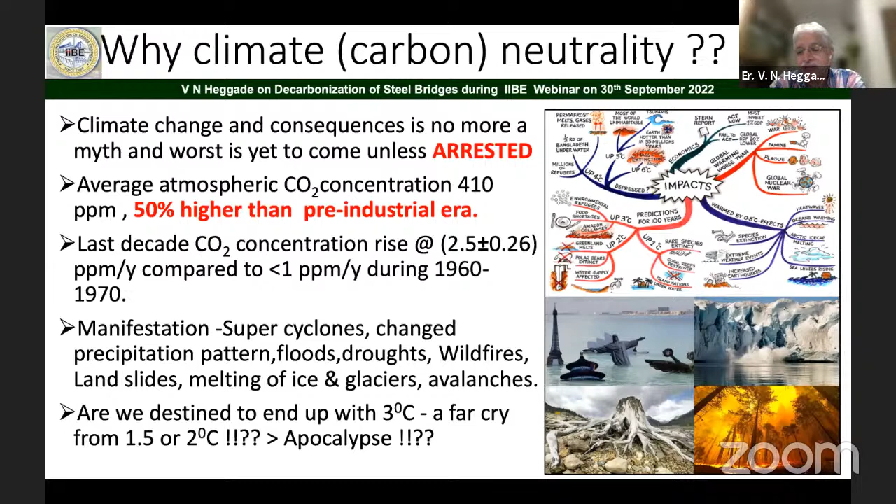If it goes to 3 degrees, we can safely say there will be an apocalypse, based on the manifestations of this climate change taking place all over the world in the form of precipitation patterns, floods, droughts, wildfires, landslides, melting of ice glaciers, as well as avalanches, as you can see here. So all of us have to get geared up to overcome this problem of carbonization, which is leading to global warming and thereby these disastrous manifestations. How to avoid that? We'll have to work on that.

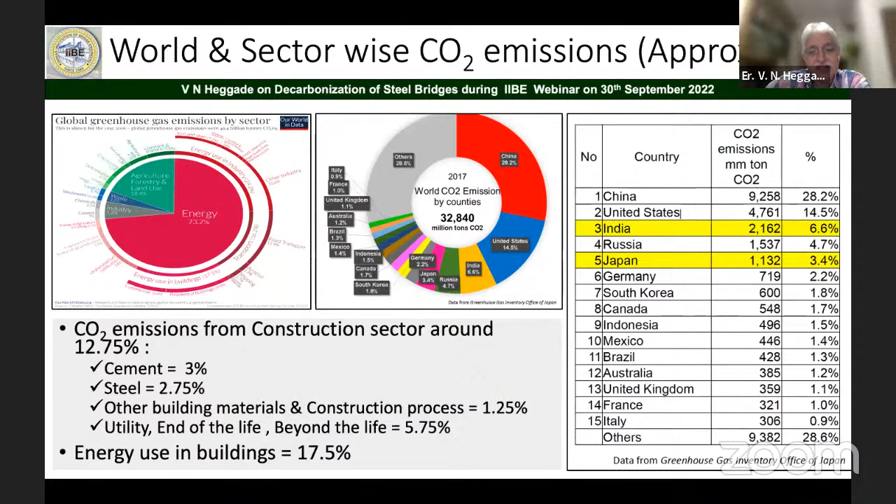Now, because of this, world leaders and thought leaders gathered together. I think it was first in Paris, what is called COP 21, and the world leaders committed to reduce carbon dioxide emissions or make it net zero by 2050, the COP 21 agreement.

The Indian commitment, as you can see here, was made in COP21, but that commitment was revised in the next meeting, which took place in 2021 in Glasgow, called COP26, where our Prime Minister very famously gave the Panchamrita, meaning 5 panaceas.

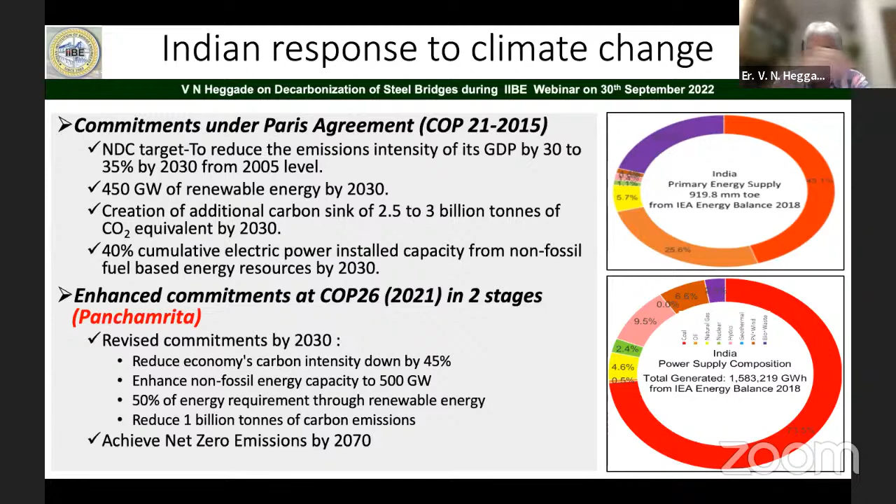Those 5 panaceas are here, like reducing the economy's carbon intensity down by 45%. He proposed this in 2 phases: 45% by the first phase, which is 2030, and then complete carbon neutrality by 2070. This is for the overall Indian perspective, not only meant for the construction sector, it's for all.

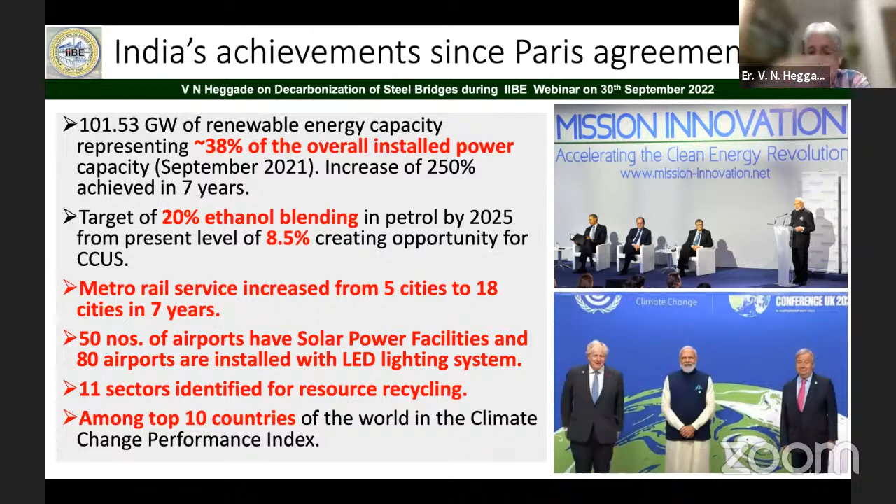But very interesting and exciting for our Indian subcontinent is that whatever we had promised in Paris, in COP21, we could achieve quite a lot of progress in carbon neutrality. And we ranked among the top 10 countries in the world. I think that's a credit. India is in the right path of achieving carbon neutrality as committed by our Prime Minister.

Now let me give the background, because before getting straight away into how to decarbonize steel bridges, let us understand what we are talking about, carbon emission. What does it mean? There are 2 types of carbon: one is called operation carbon, and another is called embodied carbon.

We'll have to understand, carbon emission or the global warming potential has always been expressed in terms of kg carbon dioxide equivalent or ton carbon dioxide equivalent. That means the greenhouse gases, along with carbon dioxide, include other gases like CH4 and N2O, but the majority of greenhouse gas emission, carbon dioxide, accounts for almost 90 to 95%. So most of us concentrate on carbon dioxide emission rather than CH4 or N2O. That is why 1 kg carbon dioxide emission to the environment has a global warming potential of 1 kg carbon dioxide equivalent.

Now, as I told you, there are 2 types of carbon: one is operation carbon, another is embodied carbon. Operation carbon encompasses carbon dioxide emission, which is always equivalent to that of greenhouse gas emission. Energy-centric operations in buildings such as heating, cooling, ventilation, and lighting systems, these are called operation carbons.

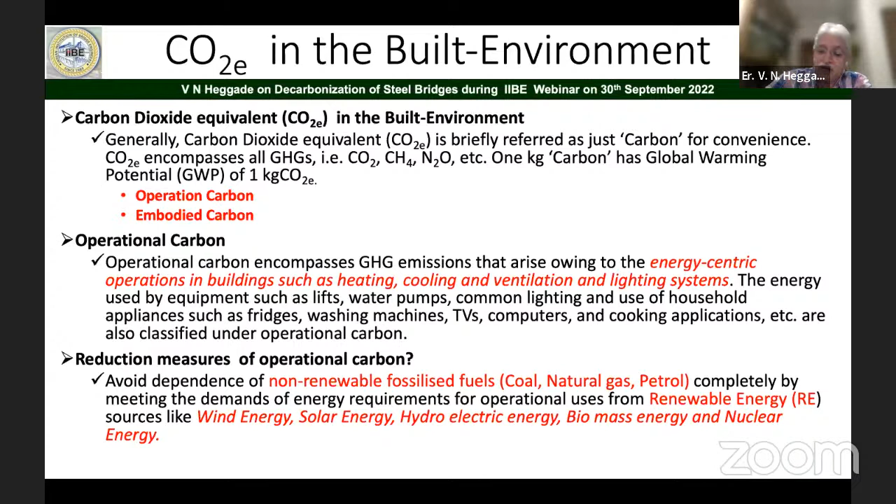So one way of reducing this operational carbon is to replace non-renewable energy sources with renewable energy sources like wind energy, solar energy, hydroelectric energy, biomass energy, and nuclear energy. Extensive research and debate is going on all over the world. In particular, the energy sector is quite ahead in addressing this carbon neutrality issue, in my opinion. There's a lot of debate on how nuclear energy can be made cheaper compared to thermal power plants, and how solar and wind energy, which are a bit more expensive compared to non-renewable fossilized fuel, can be made economical. Research is going on as to how to make it economical.

A lot of work is being done. The embodied carbon is the carbon emissions associated with the 5 main stages of the structures. Basically, we'll have to understand the product stage, construction stage, utility stage, end of life stage, and beyond the life cycle. This embodied carbon coefficient or carbon factor, when multiplied by the quantities, gives you the kg carbon dioxide equivalent which is emitted to the environment. That is the embodied carbon.

In most of my presentation today, when talking about decarbonization of steel bridges, I'll be concentrating on this embodied carbon, because 50% of the embodied carbon emission takes place at the product stage itself - manufacturing of steel itself, manufacturing of cement in case of concrete. If we can somehow control embodied carbon during the product stage as well as the construction stage, we will be able to achieve carbon neutrality by 2070 as committed by our Prime Minister. That is our aim when talking about decarbonization of steel structures or the construction industry itself.

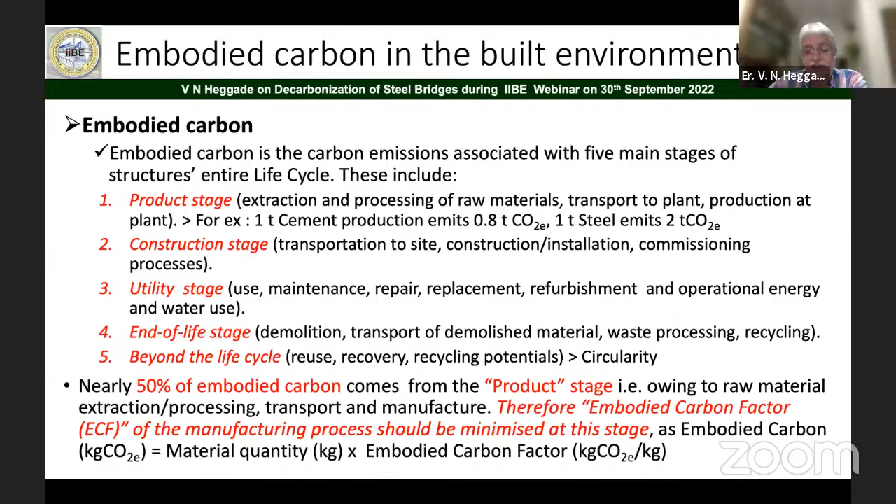Carbon neutrality is a process where carbon dioxide emissions are brought down to net zero by avoiding and reducing, and where avoiding and reducing is not possible, by setting off. That is the process of carbon neutrality achievement. Basically, that's how we do it.

First of all, we'll have to calculate. When I say estimate, we'll have to calculate what is the embodied carbon and what is the operational carbon. That calculation has to be done. Unfortunately, in India, that calculation process still has to take place, and there is no agreed consensus embodied carbon coefficient or embodied carbon factors yet - the estimation has to be done. A lot of work is going on, people are working on that, we'll have to do that.

Once you estimate it, you avoid those activities which emit carbon dioxide to the environment - that is the avoid. But construction material like concrete as well as steel is a necessary evil, we cannot completely avoid that. When it is not possible to avoid, what we have to do is figure out how to reduce this carbon dioxide emission using the same concrete and steel. That's what we'll work out in the third phase of it.

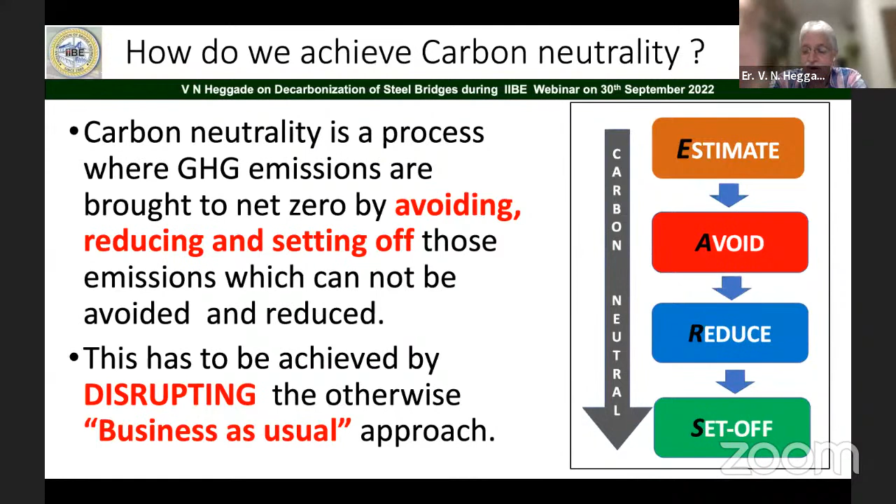When it is not possible for us to really avoid and reduce it - as I told you, it's not possible to avoid concrete or steel construction, it's a necessary evil since infrastructure is very much essential and a basic building material for us - avoiding and reducing to a certain extent is possible, we'll discuss strategies of reduction later, but avoiding totally cannot be done. So which cannot be avoided, we'll have to set off - those carbon dioxide emissions have to be set off. That is the whole package of this model, called the carbon neutral model, as you can see over here.

These core rules for the product category are called environmental product declarations. I think that's very important. On the basis of the environmental product declaration, green certification normally takes place. I think that is how it is there.

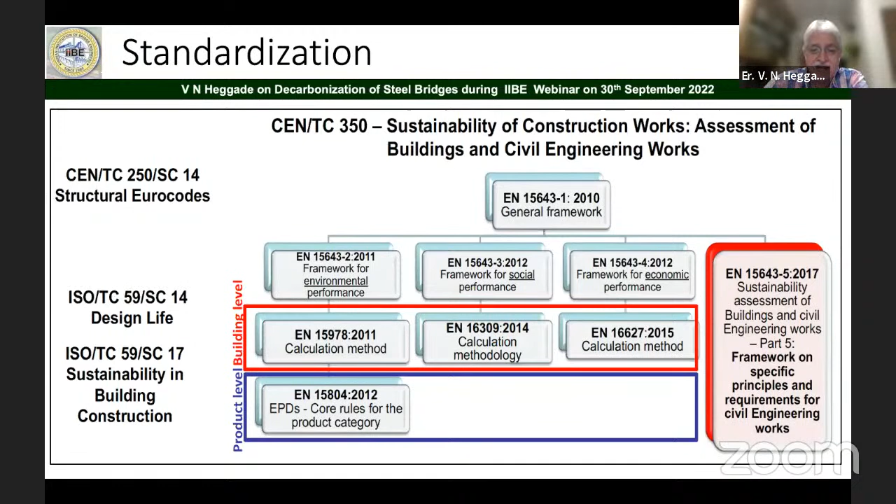The standardization is very much there, and these standardizations have come out long back. If you really look at it, 2010, 2011, 2012, 2015. So it's a work in progress. People have been working all over the globe on the standardization of sustainability since quite some time, and the Indian subcontinent will have to catch up with it.

Product stage has been represented by A1 to A3 - basically raw material supply, transport, manufacturing. In case of steel, how steel is manufactured; in case of concrete, how concrete is manufactured. I'm talking about concrete and steel because they are the major carbon emitting building materials used all over the world, and not only the world, even in India.

I also explained environmental product declarations, and when that core rule is applied only up to the construction or product stage, it is called the EPD cradle to gate. When it is applied from product stage up to end of life stage, or even reuse and recycle stage, it is called cradle to grave.

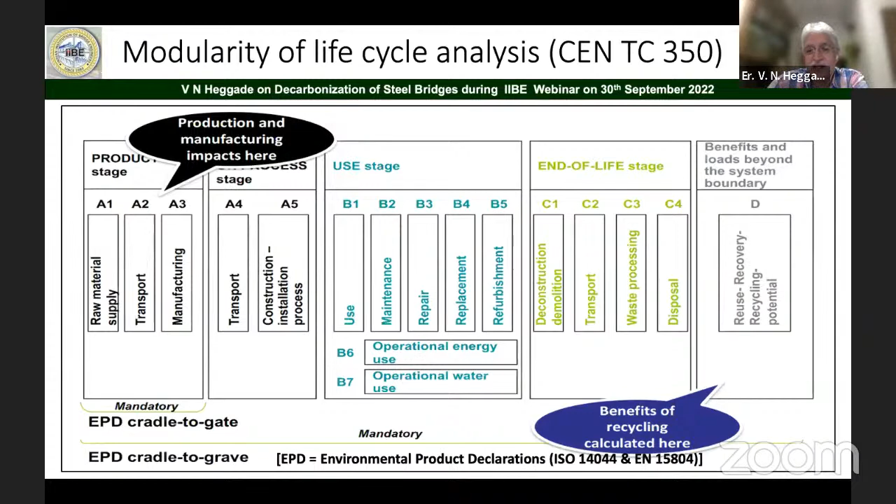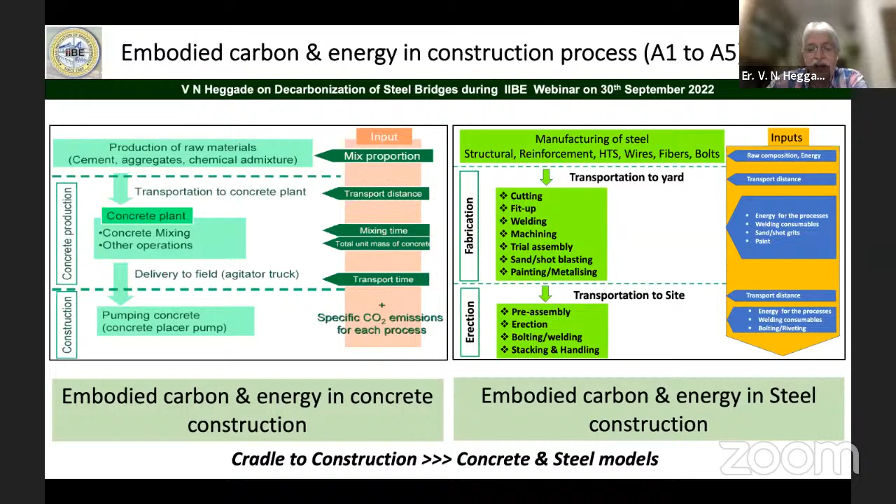Out of this 106 million tons of steel which has been used, around 29 million tons is used in infrastructure, especially coming to our topic today. 9 million ton structural steel is used in the financial year 21-22 in India. That 9 million ton structural steel used for bridges emits around 63 million ton carbon dioxide equivalent.

If you really look at it, for producing 1 ton of steel, normally on average 2 ton carbon dioxide equivalent is emitted. For producing 1 ton of steel, 18 gigajoule of energy is required. In fact, this is on the lesser side; the energy required for production of steel is much more than that in some cases.

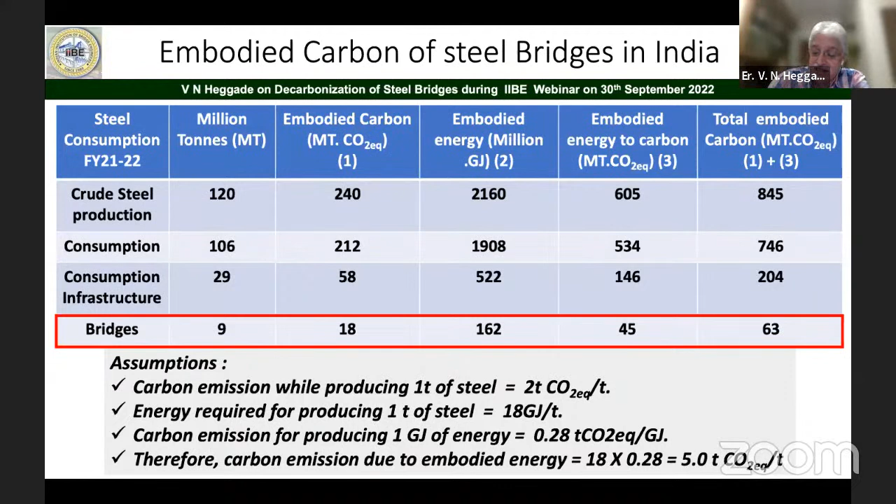In concluding, I think most of our emphasis has to be on how to replace that energy with renewable energy resources. That is what is very important as far as steel is concerned, if we want to make steel carbon efficient going forward.

Now I'll come to the strategies to achieve carbon neutrality in bridge construction. In Paris, at the COP21 meeting, an agreement was made. If you take carbon dioxide emission or global warming potential as 120% by 2015, when we had the COP26 meeting in Glasgow where world leaders gathered, we had reduced this carbon dioxide emission by around 20%, from 120%, say for example. I'm making 2021 a reference point where 100% carbon dioxide emission is taking place, especially in structural steel bridges.

Direct emission of carbon dioxide takes place while producing steel, around 2 ton carbon dioxide equivalent for producing 1 ton of steel, and that has to be reduced. Also decarbonizing energy: the energy required to produce 1 ton of steel is 18 gigajoule, and on a lenient side, around 5 ton carbon dioxide equivalent is emitted using that energy, because this energy comes from non-renewable, fossilized resources. So we'll have to see how to replace that with renewable energy sources.

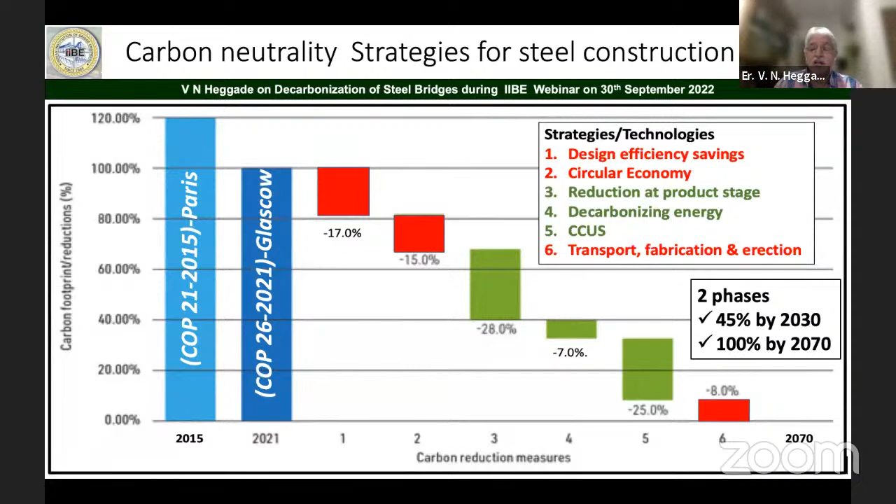It's not well-researched data, but it's on the basis of calibrated data from work done in other countries - this is my personal assessment. It's possible for us to save, in case of steel bridges: 17% by design efficiency, 15% by circular economy, 28% by reduction at the product stage itself, 7% by decarbonizing energy, 25% by CCUS, and transport and fabrication erection by 8%. By doing that over the period up to 2070, it's possible to achieve carbon neutrality, especially in case of bridges, in my personal opinion.

As I explained, what is in our hand - the civil engineers or structural engineers - in the profession: design efficiency is in our hand, construction processes including production and erection is in our hand, and to a certain extent circular economy is in our hand. Whatever comes out, if it can be recycled, reused, and we design a structure such that it can be widened later - these are the methods of circular economy. These three things are in our hand. Only 30% carbon neutrality achievement is in our hand as a structural engineer, which I can see.

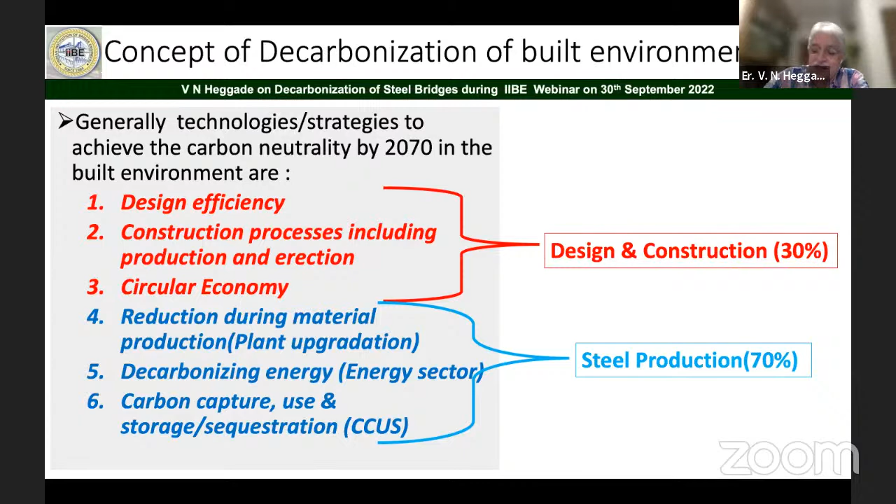But the rest is the reduction during material production. That has to be done by plant upgradation, increasing the efficiency of the plant, decarbonizing energy - that is with the energy sector. Our steel manufacturers have to have a captive power plant with renewable energy resources - that's the suggestion and recommendation I'm going to give later. And carbon capture, use, and storage - research has to be done, and that's perhaps not in our hand. Only 30% of carbon neutrality is, in my opinion, in structural engineers' or civil engineers' hands.

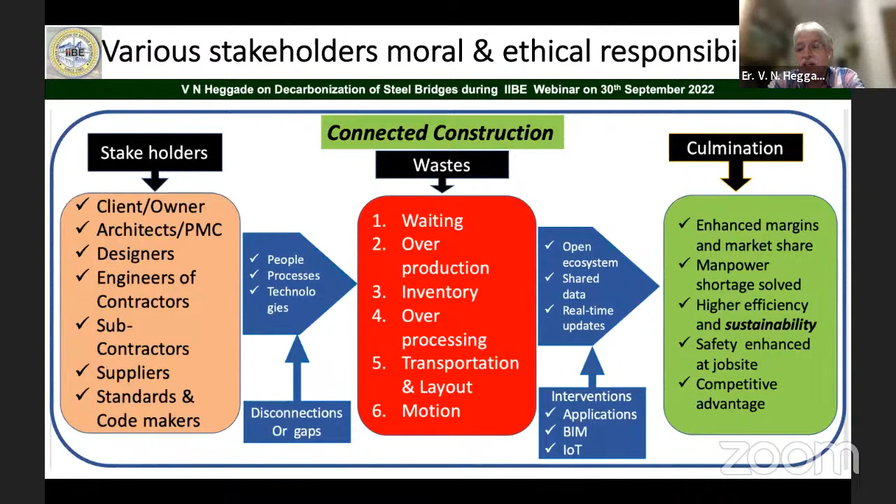Now let us understand that construction is connected - there are various stakeholders: client and owner, architects, PMC, designers, engineers, subcontractors, suppliers, and standards and code makers. So many stakeholders in construction - it's totally connected. It cannot be left to one stakeholder, even including the policy makers, which I'll come to. All stakeholders have to be oriented towards carbon efficient technologies and this commitment of achieving carbon neutrality by 2070. It's no more just a duty - it's an ethical and moral responsibility of all of us to achieve this.

Otherwise our posterity will be in trouble because of climate change taking place. Now, what could be the roles and responsibilities of owners, engineers, architects in achieving carbon neutrality? In developing countries, mandatory use of recycled material from demolition and construction waste can be adopted. Mandatory use of manufactured aggregates, like slag from steel production - slag is an industrial byproduct of steel manufacturing - has to be used as much as possible. In concrete itself, up to 85% slag can be used, and there are slag aggregates also that can be used.

Recycling glass residue as lightweight aggregate, replacement of OPC with mineral admixtures like slag - slag being an industrial byproduct of steel making.

Going for HPC, HSC, high grade steel for enhanced sustainability, self-compacting concrete, UHPC along with HTS, design build contract type. In the design build contract type, it is possible for us to do the value engineering as well as the carbon value engineering, which I am going to propagate in the next slides.

Very importantly, the role of owners as well as architects who prepare the DPR, the other engineers, have to specify the limits for carbon dioxide emissions and energy consumption in the contract itself, with stringent penalty clauses for exceeding the same. Also, the QCBS methods used for contracting and procurement have to have the carbon footprint as one of the major criteria. A lot of emphasis has to be given on that.

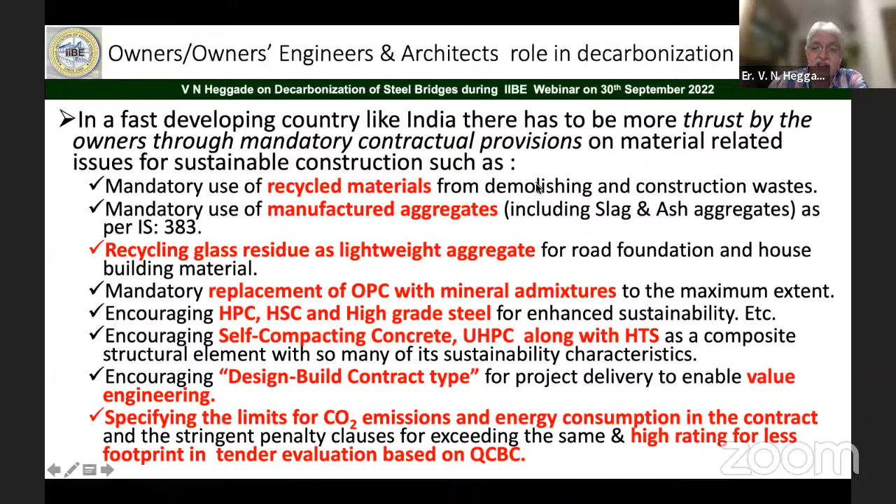Now, as I told you, in concrete construction, if you want to achieve carbon neutrality, one of the ways is replacing cement with mineral admixtures. Cement in 1 cubic meter of concrete, if you really look at it, contributes to 90% of the carbon dioxide emission.

I think also nowadays we are allowing, even in IS 383, the use of slag aggregates. It's been permitted only up to 10% replacement of natural aggregates, but I think we should allow up to 30 to 40% of slag aggregate. Also, slag has to be processed in the plant itself in such a way that it can be used in concrete production.

The only thing is, the debate is going on for the carbon credit for this—whether the use of slag should be credited to the steel industry or the concrete industry. But I think it's a byproduct of steel, so perhaps it's better, in my opinion, to give the credit to steel manufacturers.

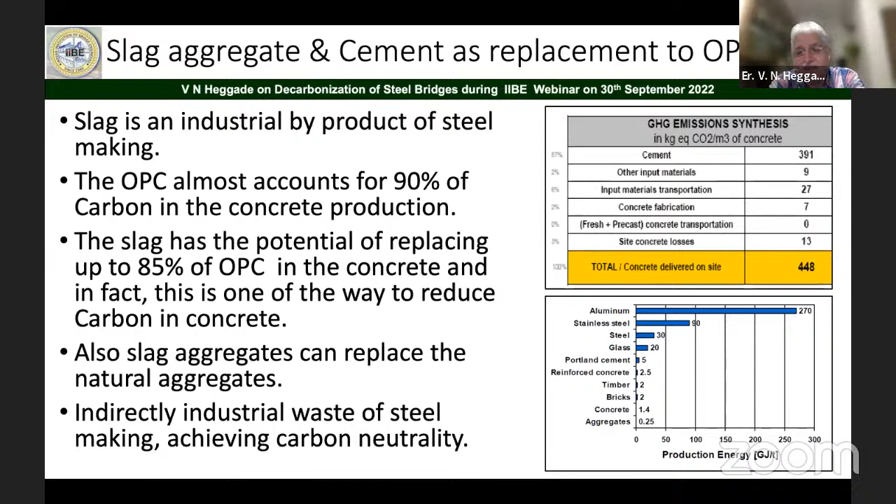Another thing is the designer's responsibility through value engineering during engineering and design. Normally, for any project, the value is created at the design and engineering stage itself, up to 70%. When value engineering can be done at this stage, up to 10 to 15% saving is there—15 to 17% of the cost can be reduced.

Similarly, this concept of value engineering at the design stage can be expanded even to carbon footprint reduction, what I call carbon value engineering.

In fact, luckily for us in the construction industry, when we make structures economical through value engineering, automatically carbon value engineering also takes place, because the whole idea of value engineering is to reduce the mass of the building material itself in the project. If you're able to reduce the building material quantum in a particular project through value engineering, I think we'll be achieving carbon footprint reduction to a large extent. This is one of the ways, and we'll have to emphasize carbon value engineering going forward.

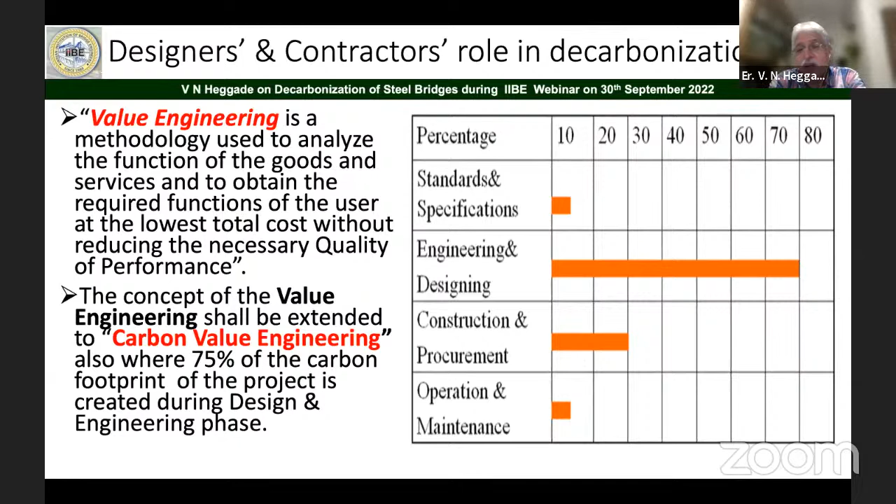It's not just value engineering for reducing the cost—that's very, very important in my opinion.

Let us look at some of the sustainability characteristics of steel bridges. There's a lot of myths as far as steel structures are concerned—people feel that it is not durable, not elegant looking, and also sometimes maintenance prone.

It requires a lot of maintenance, but the facts and statistics all over the world, not only in India, prove it the other way around. If you really look at some of the bridges which have been lasting for a long time in India, the Abdul Bari Bridge is a bridge opened in 1862.

I have not come across any prestressed concrete bridges which have been serving more than 100 years. Of course, prestressed concrete technology has not evolved; it's only evolved in the last 60 to 70 years. It has not seen the test of its time. But still, if you really look at it, some of these bridges have been lasting for a long time.

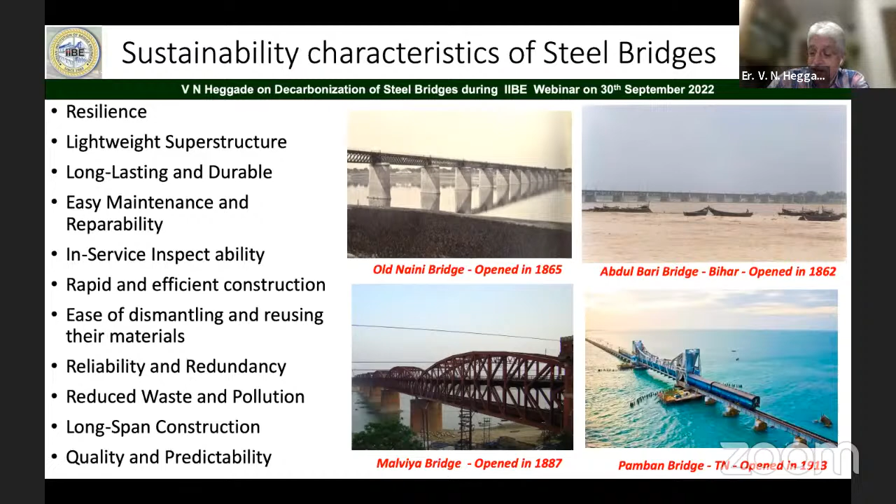I think I'm going to show some of the slides. Quality and predictability is certain in case of steel construction. So it has been long lasting, and it has highly sustainable characteristics, these steel bridges, if you really look at it, compared to its counterpart concrete bridges.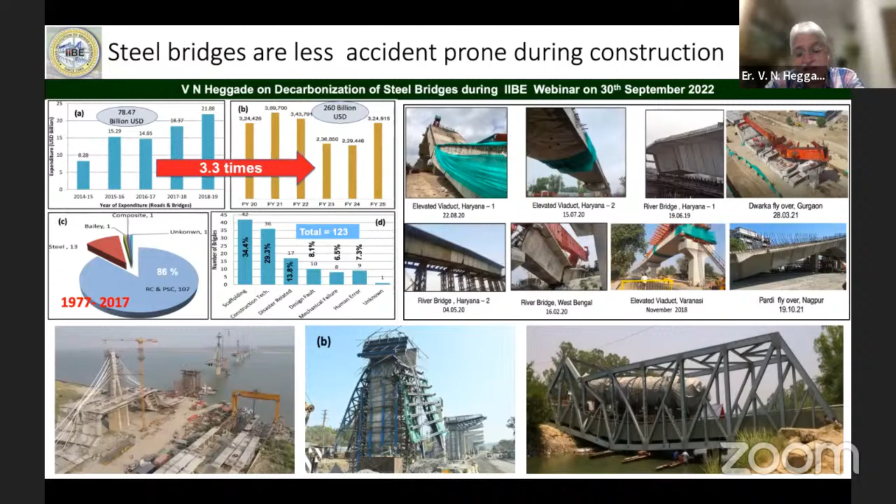So it's less accident prone, which I can see here. Also, it enables long spans compared to RCC as well as prestressed concrete by virtue of its high strength-to-weight ratio and also high ductility, perhaps.

Most categories, if you really look at it, world record holding bridges are in steel, steel as a building material in case of bridges. This is the Canakkale Bridge, a 1915 bridge, which is in Turkey. This is a 2023 meter span, record holding. Russky Bridge holds the record right now for the cable stay bridge.

Quebec Bridge at Canada, 549 meters—it's a cantilever bridge, and it basically holds the record for the longest cantilever bridge. Arch Bridge in China, 552 meters, also holds the record for arch bridges. This is not a composite arch—this is a pure steel arch bridge, as you can see here.

And also, surprisingly, the extradosed bridge—what all of us understand is that extradosed bridges can only be constructed using concrete, prestressed concrete particularly. If we really look at it, even for the extradosed bridge, the world record holding 312 meter long extradosed bridge, constructed in China, that again posts the record. It's a double-decker extradosed bridge, as you can see here.

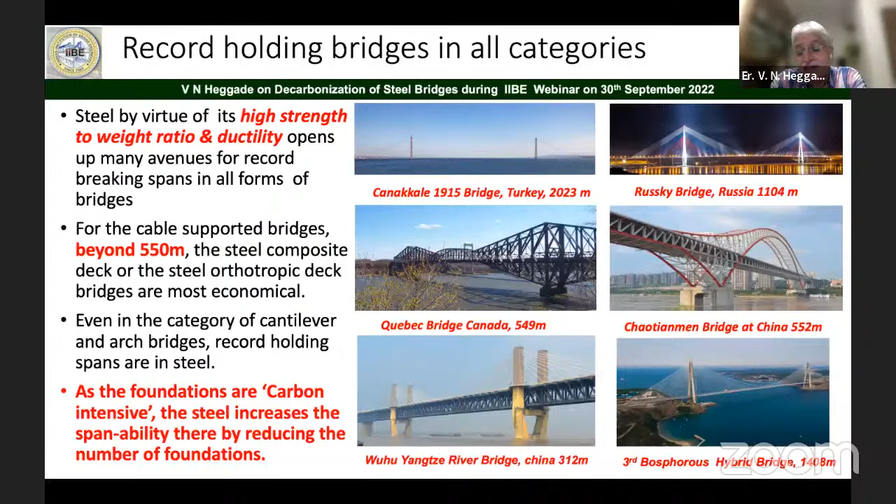One of the advantages of going for long spans, especially in creeks, seas, and rivers, is that it reduces the foundation. Studies show that foundations and substructures in rivers and creeks are highly carbon intensive, and not only that, highly uneconomical as well. So it's necessary to reduce the foundation. The spanability, or the ability to increase span using steel structure, reduces the foundation, which reduces carbon emission to the environment and helps achieve carbon neutrality.

Another myth is that steel structures look ugly, like trusses and those sort of things. But it's possible to have wonderful, elegantly looking bridges like the Namaste Signature Bridge at Delhi.

I christened it, or named it, the National Namaste Signature Bridge because it has a Namaste pose welcoming the onlookers on the bridge, and it is a signature bridge in the national capital. That's why it can be called the National Namaste Signature Bridge, and it reflects the local culture and tradition in its visual form.

Another bridge, the Atal Bridge, which has been inaugurated by Mr. Modi recently in Ahmedabad—if you really look at it, it reflects the kite culture of Ahmedabad.

Another bridge, at the bottom left, is the Deccan Footover Bridge in Pune—the Puneri Pagadi, or Pune Peta, as they call it—reflects that culture.

The third is the Sambhaji Tanpura Footover Bridge, which will also come up in Pune. It reflects the Tanpura—Bal Gandharva Hall is nearby, where Bal Gandharva used to sing with Tanpura played along with his singing. That sort of cultural reflection is there.

So steel structures, steel bridges, could be highly elegant and aesthetically pleasant. Something in the aesthetic and elegance is always associated with sustainability.

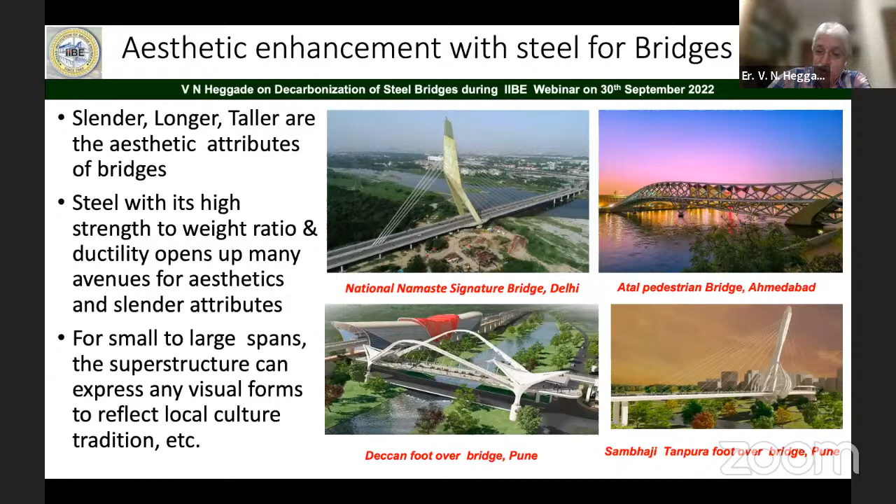I'm not able to really pinpoint what is that awe factor which makes aesthetically looking bridges more sustainable. I think there is always some relationship between aesthetics and sustainability, though it is not possible to really quantify that, in my opinion.

As I told you, maybe fewer accidents are taking place during construction in case of bridges, but though it is less, many accidents are still taking place because there are not sufficiently trained designers in the market, and somehow academic institutions are not giving much importance to the design and construction of steel structures, with the number of credits in engineering colleges being quite less.

Emphasis is always given to concrete structures. Perhaps there's a need for us to look into these engineering subjects—the academia has to concentrate on that.

Another aspect: as far as concrete is concerned, even concrete production, the concrete technology, has been well taught in universities. But when it comes to steel, it involves fabrication technology—the steel is already prepared and given. The composition of steel and manufacturing technologies of steel, I think, perhaps structural engineers also need to be taught. Presently, fabrication and processing of steel manufacturing is only taught to mechanical engineers, if I'm not mistaken.

Perhaps there's a need to strengthen education in steel designing, steel fabrication processes, and steel making itself. If it can be taught extensively in engineering institutions, and we can professionally train steel designers, I think it will go a long way in stopping these accidents which have been taking place, though it's not as much as in concrete bridges.

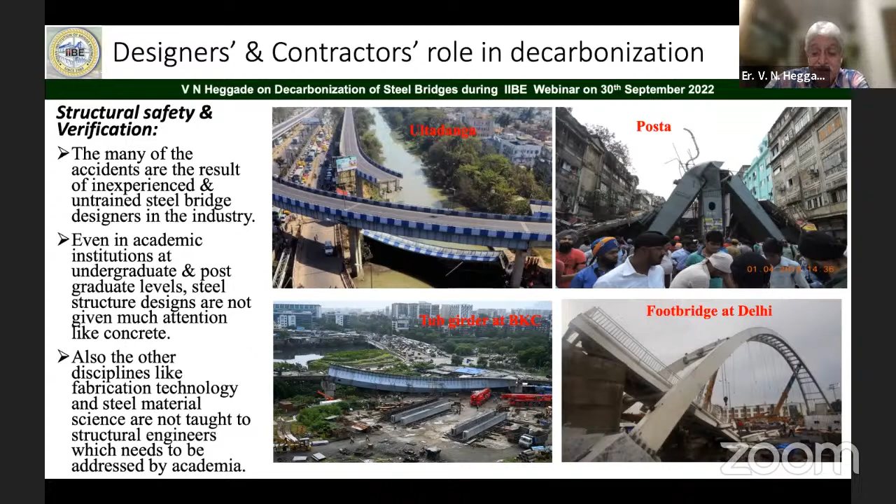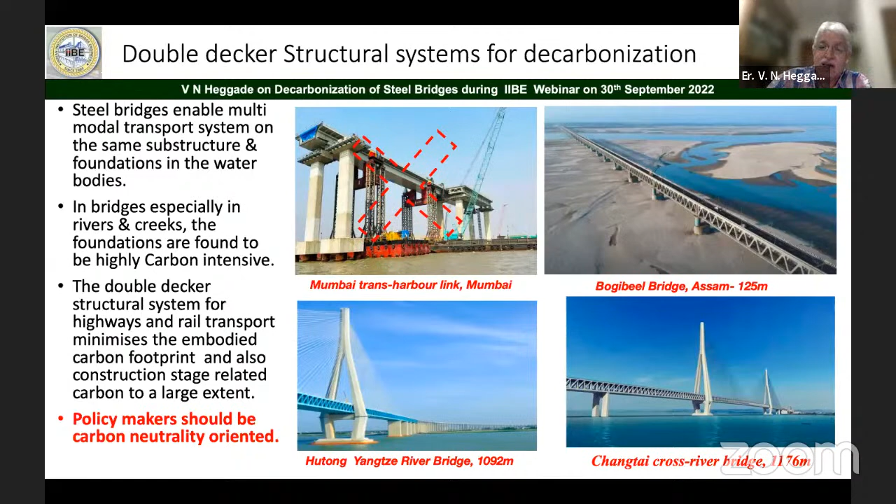This kind of long span arch is made possible by use of concrete filled tubes, basically high tensile steel tubes filled up with high strength, high performance concrete, and the spanability is increasing. Going forward, I think it's not only 575 meters - now with the advent of ultra high performance concrete, also steel of strength of 1000 MPa, the combination of these two will lead to much higher span arch bridges with CFT, the concrete filled hollow section tubes. This structural system, combining ultra high performance concrete with ultra high tensile strength steel, will give a lot of sustainable options for steel bridges too.

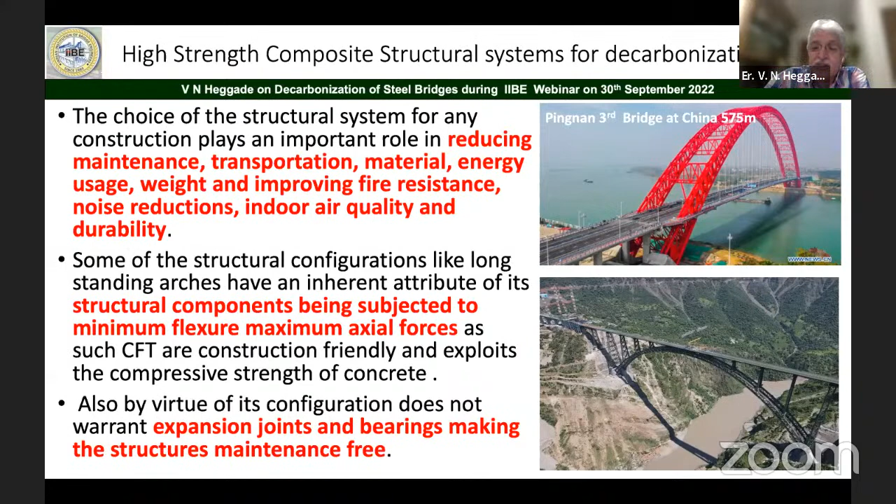This is for the bridges, buildings. I'll just skip this slide.

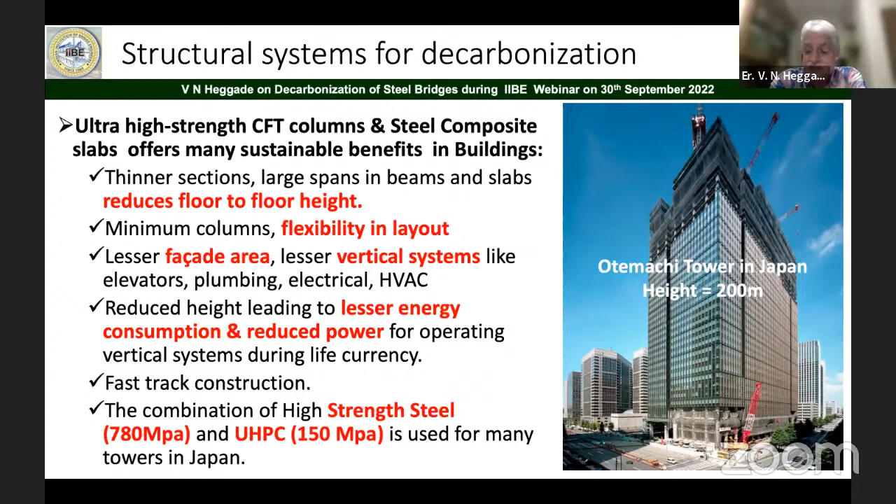Even in buildings, composite columns, which have been extensively used in Japan, combine 150 MPa ultra high performance concrete with 780 MPa high strength steel, making it possible to increase the space inside while the facade area is reduced, with many advantages. Sustainable options are there, but I think that's in buildings, not bridges, so I'll just skip.

How can designers save through design efficiency by using very high strength steel and concrete to reduce mass, different types of steel - stainless steel, weathering steel, high strength steel - and the detailing category of fatigue. If you go for a welded connection detailing category, normally the section requirement is high. I think as far as possible, it's better to avoid welded detailing categories and go for bolted detailing categories where the steel section size can be reduced, and standardization and modular construction can be used for waste reduction and fast construction.

Pre-stressing steel bridges to reduce the quantum of steel - I think this should be explored more and more going forward. Pre-stressing can not only be used for concrete but also for steel trusses. Going forward, we should use those options.

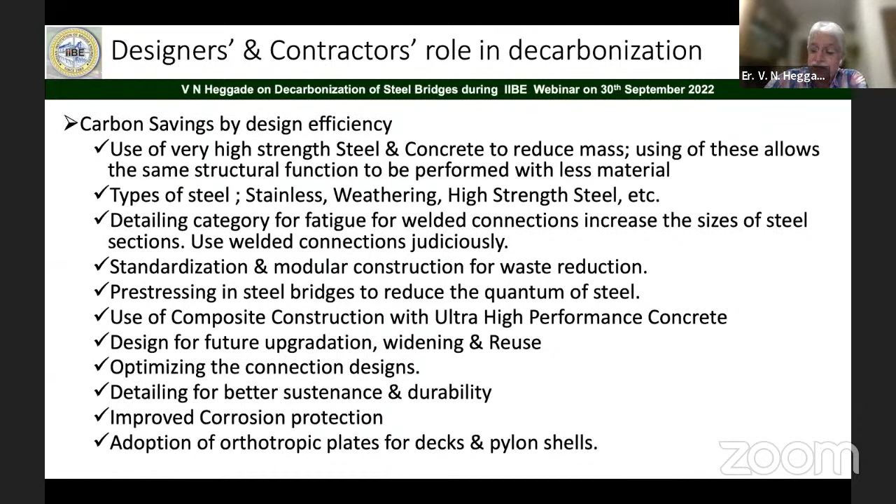Use of composite construction, as I explained. Designing for future upgradation, widening as well as reuse, optimizing connection details for better sustainability and durability, improved corrosion protection, adoption of orthotropic plates for the decks and pylon shells. When the pylon is made of steel, even the shells of the pylon can be made with orthotropic plates, as orthotropic plates require less quantity.

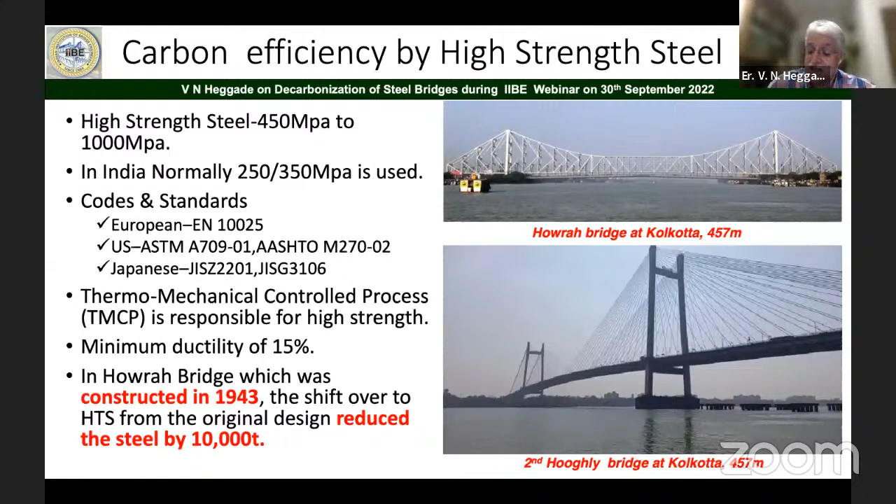Another option, especially in coastal areas where you want the durability of concrete, perhaps it is better to go for stainless steel. One example is the foot over bridge done in Visakhapatnam. I think MORTH is coming up with a policy to make stainless steel mandatory in areas close to the sea. That seems to be a good option from the carbon footprint reduction point of view, especially since maintenance requirement is less.

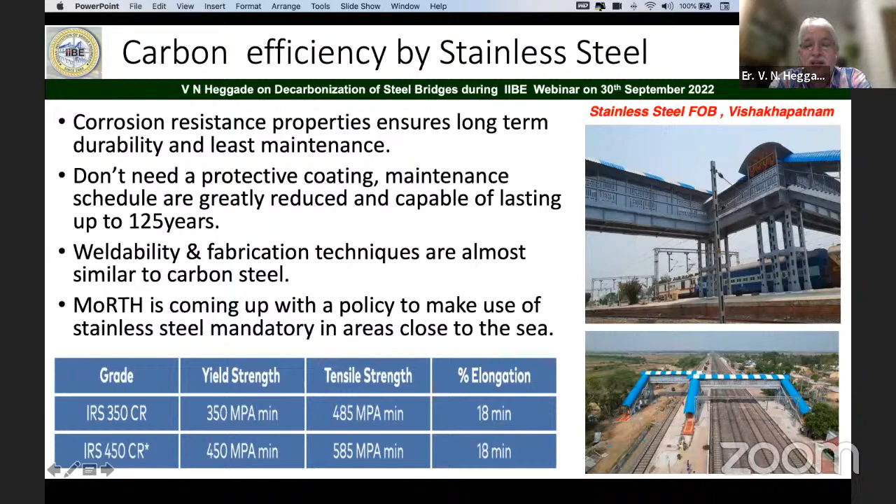But the only thing we'll have to be watchful about is producing the stainless steel. Using the current state of the art, the energy required is 50 to 60 gigajoules per ton of production of stainless steel. Unless this energy requirement is replaced with renewable energy sources, I think carbon intensity wise, it's not going to be a carbon friendly product. Only from the maintenance point of view it may be beneficial, but unless this energy requirement is replaced with renewable energy sources, it is going to be carbon intensive.

Other option is the weathering steel. I think by going to weathering steel also, it's possible to really reduce the maintenance requirement. Normally a dense and sticky rust layer forms on top of this kind of steel, and it takes some time for this to form. This rust resists ion penetration into the steel and initiation of the corrosion process. Bridges can be designed even up to, in my opinion, 150 to 200 years with weathering steel. But the thickness requirement, the rust thickness requirement, may be more, and accordingly it has to be designed.

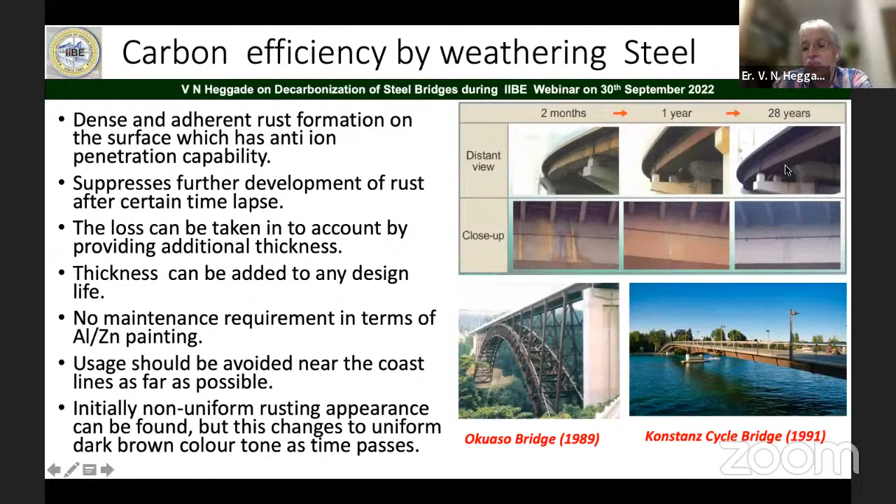There are some examples, such as the Okuaso Bridge done in 1989, as you can see here, and also the Konstanz Cycle Bridge which has been done. There are several examples. In the initial stages this rust formation may look non-uniform, but over the period it becomes a dark brown color, as you can see here in the right hand top corner of the slide.

Another carbon efficiency technology is modular bridges, which has been discussed in our B5 committee. I think it's good that the convener of the B5 committee, Mr. Puri, is among us today, and we will be able to bring this out too. Modular bridges enable very fast construction, reduce wastage, and when construction is fast, traffic congestion is reduced - traffic blockade will not be there for a long time. These panel bridges are faster to assemble and simple to launch. The span can be in multiples of panel length, and they can also be said to be carbon efficient bridges. There are patented modular bridges, like Acrow, and several others in fact.

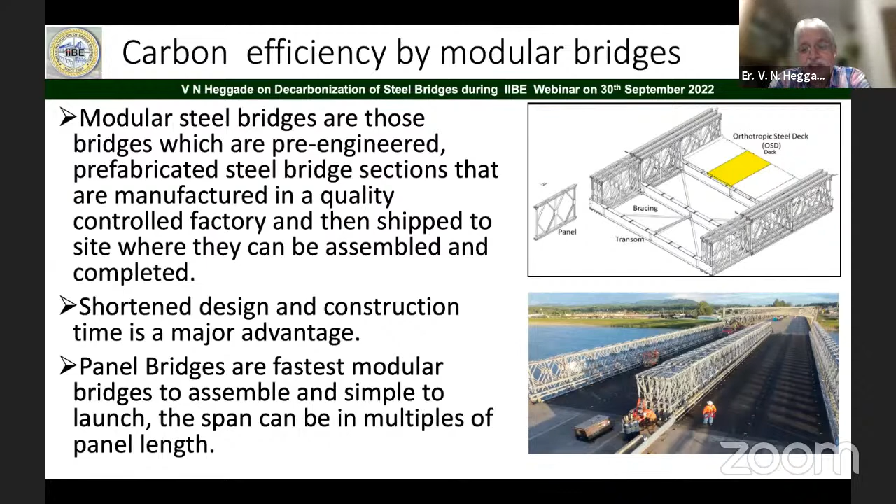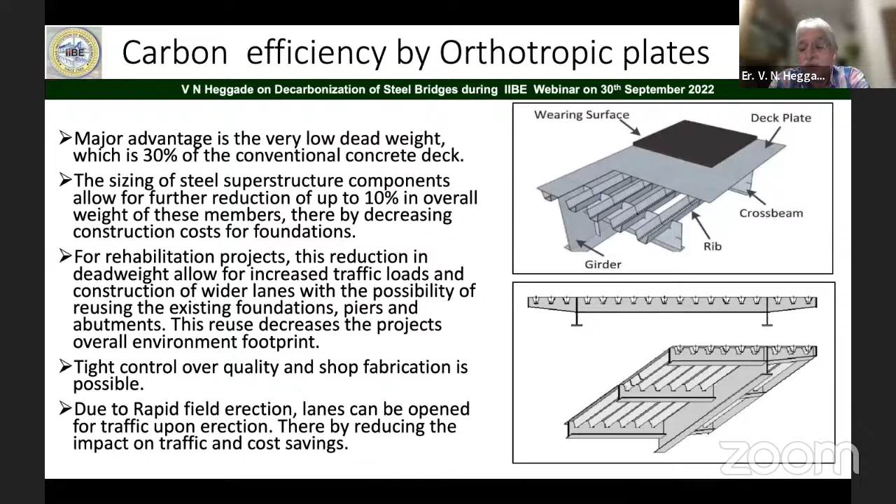Also, the steel in the decks as well as the pylons, as I told you, can be reduced by going for the orthotropic plate system. As you can see here on the right side, in the transverse direction as well as the longitudinal direction, they have different properties. Basically, in the orthotropic plate, you can see here this longitudinal girder, this cross girder, and again several longitudinal girders. It's possible to reduce the weight of the steel this way. When the weight of the superstructure is reduced, in turn the foundation weight is also reduced, making it possible to have a carbon efficient solution by use of orthotropic plate solutions too.

In my opinion, the most important thing is the role of the standards and the code makers in decarbonization. In case of steel bridges, I think the B5 committee comes into the picture. They have been bringing good guidelines. The tub girder guidelines are going to be approved by the council shortly.

There's a need for guidelines on extradosed as well as cable stay bridges, especially cable stay, where the composite girder for the long composite deck for long span cable stays is invariably required, especially when going beyond 550 meter span. Cable stay bridges are normally economical, and also carbon efficient, with the composite girder deck. In fact, beyond 700 meters, you will have to go for the orthotropic plate deck, which is steel, and on top of that you will have the wearing course, directly laid on top of the orthotropic plate. That's how the work is normally done.

Very important is the review of safety factors to make the structures less carbon embodied. The safety factors and load factors used for concrete need not be used for steel structures. When you talk about load factors, variation in density is possible in concrete as a material, and casting imperfection is possible. In steel structures, using steel plates, that variation is not possible to that extent. So it's necessary for us to really look at these load factors, especially for steel structures.

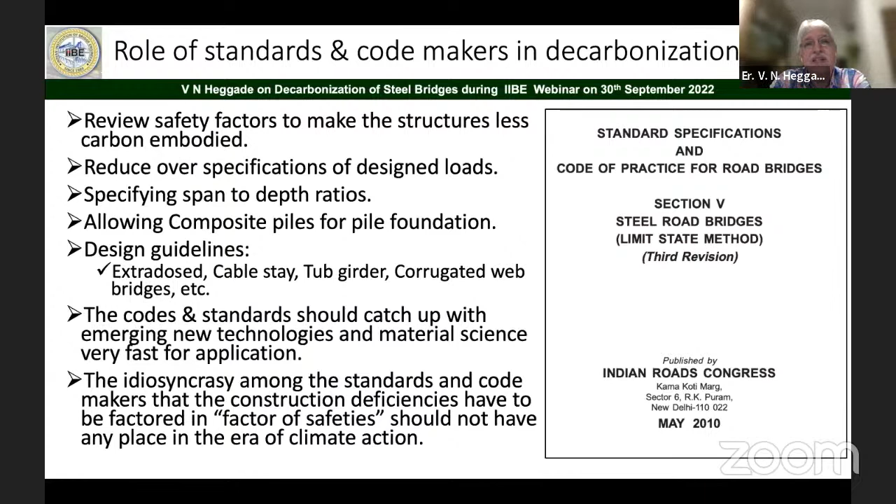I think it's possible to improve the workmanship at the site. If people are not doing proper work, those who are responsible for getting the work done properly have to get it done properly. That is where the concentration has to be, rather than having an idiosyncrasy to cover up workmanship by increasing factors of safety, which makes the structure carbon sensitive - carbon efficiency is lost by increasing factors of safety, as I've especially seen happen during the codal committee meetings.

Sometimes I think it may come even from me, but we'll have to get out of that. Then how do we reduce this carbon footprint during the transportation, fabrication, and erection? The only way, I think, is to replace the energy source.

I consider around 8% carbon emission takes place in steel bridges due to transportation, fabrication, and erection. That's from my study, but it may vary quite largely depending on various studies, and that has to be reduced. This can only be done through use of renewable energy, especially biomass and solar energy. Wherever possible, solar energy, biomass energy, and wind turbines can replace the non-renewable energy sources presently being used. That's the only way to reduce the carbon footprint during transportation, fabrication, and erection.

Also, some carbon efficient fabrication technologies using digital technologies and renewable energy can be used—LED lighting, reduction in compressed air leaks and gas systems, power optimization, use of inverters, new generation hybrid and electric company vehicles for transportation of materials inside the fabrication yard, and waste minimization including consumables waste. These are some methodologies that can be used during transportation.

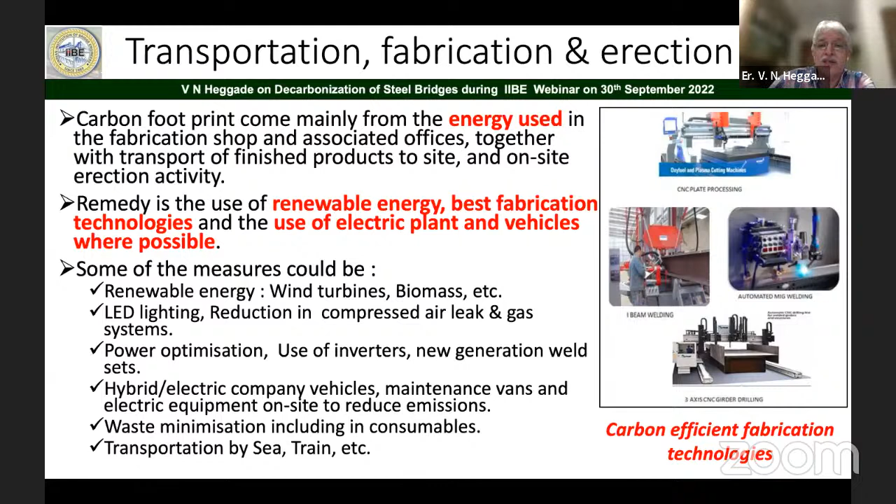When the material has to be brought from the steel manufacturers to the fabrication site, we'll have to evaluate which transportation mode—sea, train, or road—is economical and less carbon intensive. That has to be studied before deciding. These are some of the methodologies for transportation, fabrication, and erection.

Finally, I'll come to the circular economy and look at steel structures. Steel structure is truly compatible with circular economy models because it is recyclable and fast constructible. None of the steel—whether stainless steel, weathering steel, normal steel, or carbon steel—none of these are wasted; all these steels are recyclable and can be used once again. So from that point of view, structural steel as a material is utmost compatible with circular economy models.

And here is one of the cases. It's a very versatile and flexible material by virtue of its high strength to weight ratio and also the ductility which it has got.

This is one example where a bridge constructed using pre-stressed concrete technology, state of the art at that time, has deteriorated over the period. The superstructure started sagging because of what we call long-term creep phenomena—not because of corrosion, as has been said in many forums, but particularly because of the long-term creep phenomena.

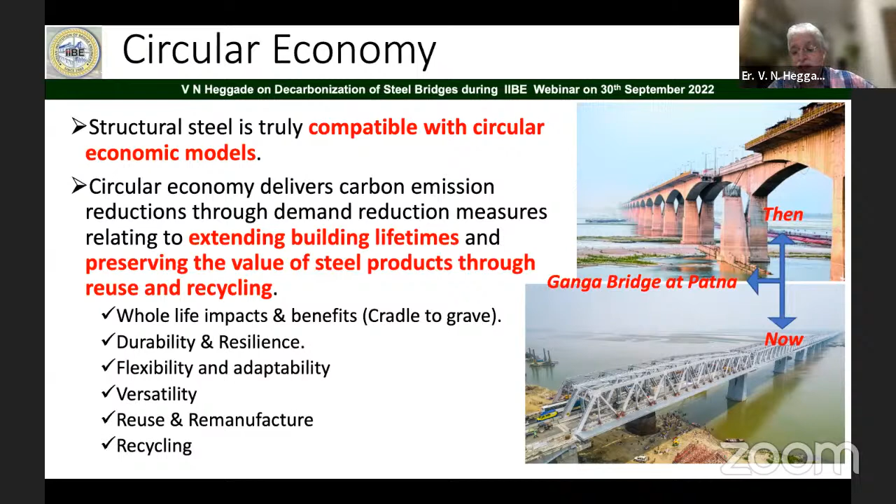Also, the central hinge which was in vogue at that time contributed to the sagging. In long span bridges, foundations are more carbon intensive, and not only that, it's highly uneconomical to do foundations in the river. Here's a particular case where the concrete superstructure is replaced with a steel truss superstructure, as you can see. This can be used to prolong the life of the existing structure, making it less carbon intensive. So steel is a highly circular, economical model oriented material.

When talking about life cycle assessment of bridges—economically, global warming wise, or socially—we have four different boundaries. That's the product stage, the material production stage, what we call A1 stage. Then the bridge construction stage, again an A1 stage, is another boundary. Then the bridge use stage, where maintenance takes place, where expenditure occurs financially, socially, and in terms of global warming, all during these four stages.

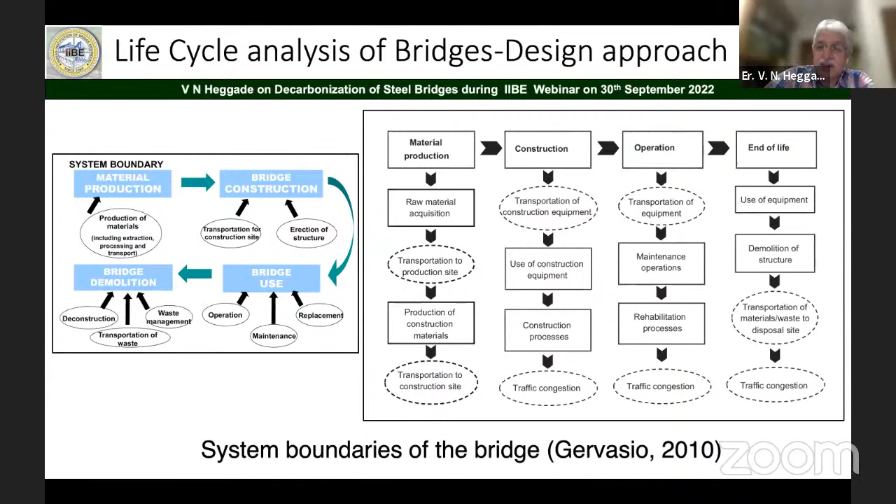Even the bridge demolition stage, which is possible for us to do the economic assessment, environmental assessment, as well as social impact assessment, as you can see here.

Now, during the maintenance or operation phase, what is normally done in the life cycle assessment is, say for example, around 100 years. Suppose a bridge is designed for 100 years, that is the life for which we design the bridge in India, as per the Indian codes. If we design the bridge for 100 years, the surface of the deck has to be replaced once in 25 years and once in 75 years.

This could be the maintenance regime which you can define: rehabilitation of the deck can take place once after 50 years, and a new surface, abutment, and say for example steel beams protection can be done at 25 years, and we can specify 50 years and 75 years.

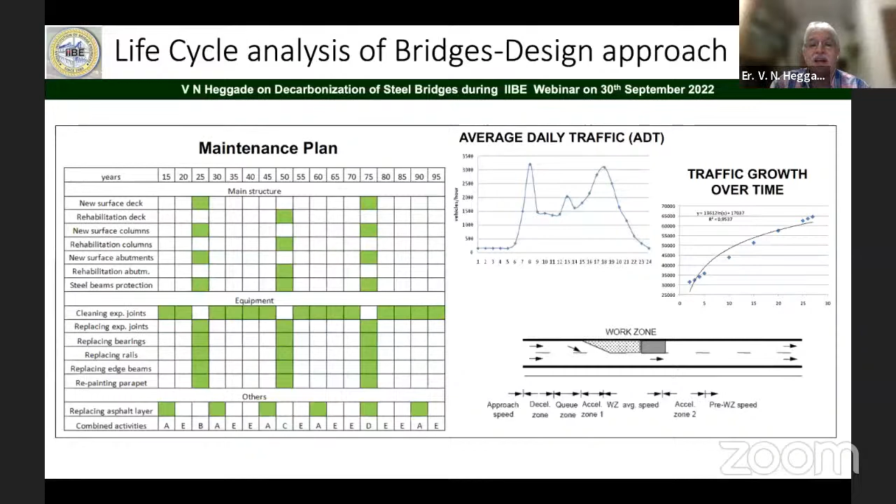In fact, I explained about this environmental impact. Apart from global warming or carbon dioxide emission impact, under the environmental impact assessment many things have to be studied, but at this stage I think it's enough for us to study the global warming thing.

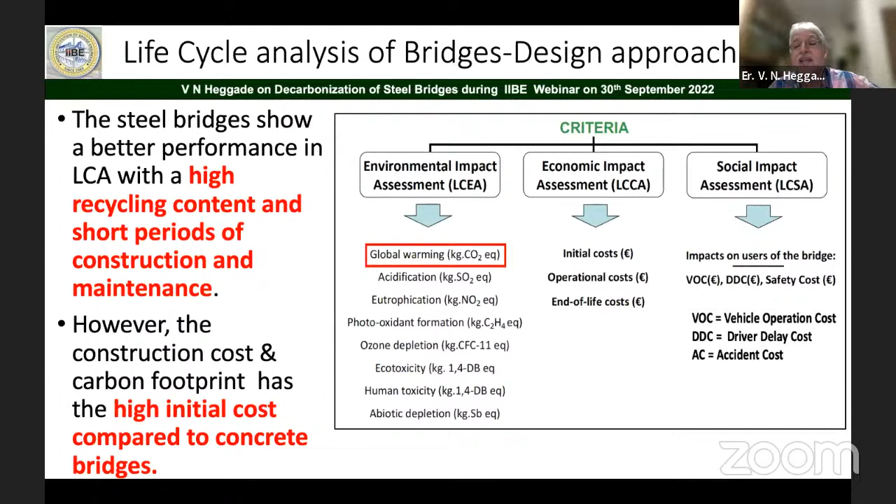Of course, in the economic impact assessment, the initial cost, operation cost, end of life cost has to be calculated. Social impact includes the vehicle operation cost, driver delay cost, and accident cost, which has to be calculated when you are doing the life cycle analysis, as you can see here.

This is just a broad view on the life cycle assessment, how it can be done. A lot of research is going on all over the world, in fact, and we can take cues from there.

In fact, the responsibility of giving a guideline on the life cycle assessment is with Dr. Harshavardhan Subbarao. He has been collecting a lot of information, and we'll have to come out with the life cycle assessment calculator for both the economic model as well as the global warming model - that is the carbon dioxide emission model for that matter.

In conclusion, I would like to say that if you really look at the analysis which I showed here earlier, the embodied carbon of the steel which has been used in the bridges is around 63 million tons.

Carbon dioxide equivalent being emitted to the environment. This 63 million tons carbon dioxide emission has to be brought to zero, as committed by our Prime Minister, by 2070. All of us have to do this.

From the structural engineering fraternity or the civil engineering fraternity, I can assure that with design efficiency, circular economy, as well as transportation, fabrication, and erection, it is possible for us to bring this down to zero by 2070. But my worry is that 70% of the embodied carbon is due to the embodied energy.

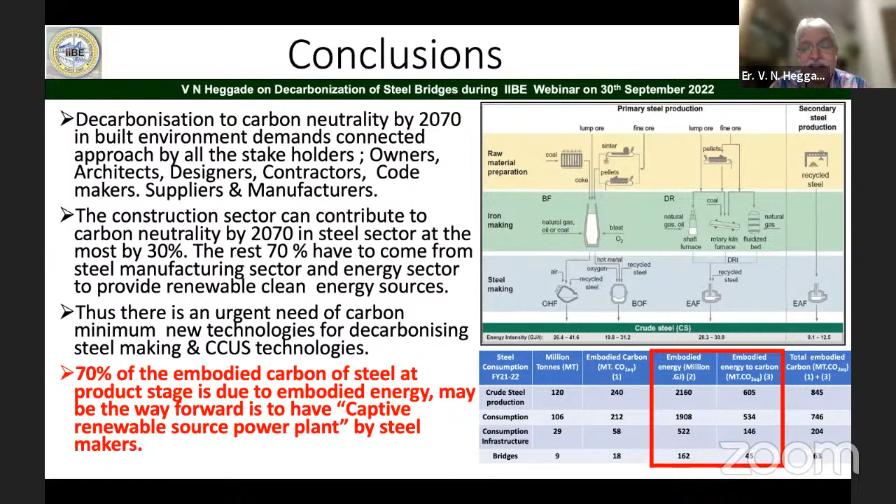The only way to go about it is we have to insist that our steel manufacturers have their own captive power plants, so that they get this energy from renewable energy sources.